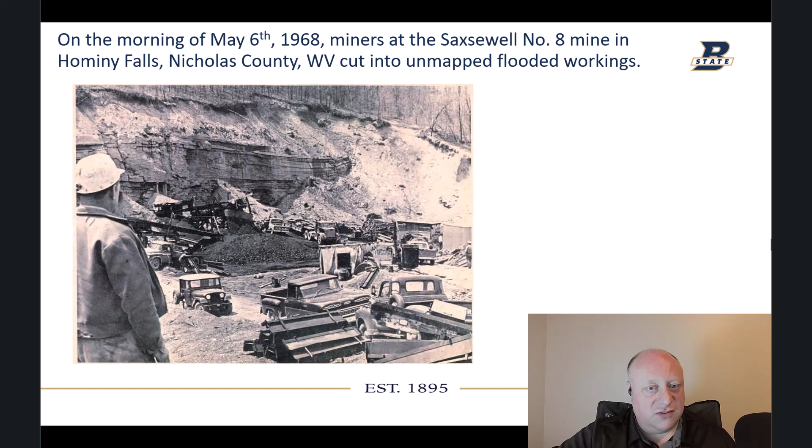So on the morning of May the 6th, 1968, miners at the Saxsewell No. 8 mine in Hominy Falls, Nicholas County, West Virginia, cut into unmapped flooded workings. The amount of water that was coming through the No. 3 heading where they cut in was described to be like opening the gates on Summersville Dam.

Now this dam had only been there about 2 years, and this was before they put in the hydroelectric part of the plant. So they're talking about what you see in this picture — I'm talking about like 3 tubes, just blasting water. That's what they described it as, which is significant. They're saying the water was roof to floor and rib to rib.

And in this mine, they were mining with presumably Wilcox miners — I know they were mining with an auger type miner, that's probably what they were using. And they were mining 32 to 34 inches high, so it's a thin seam. But the headings were advanced 30 feet wide.

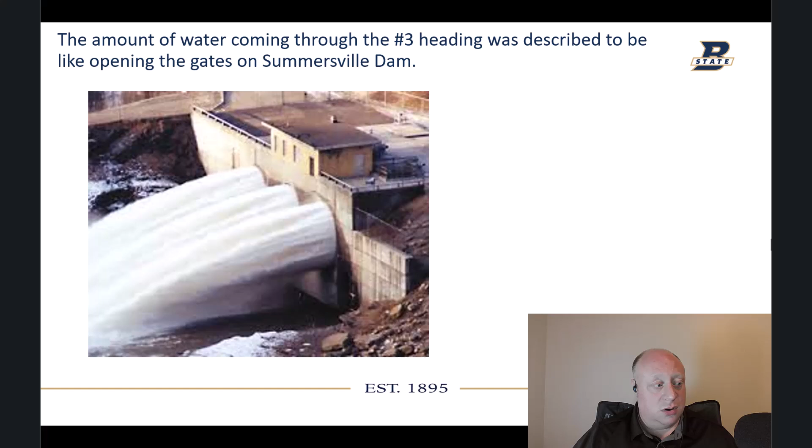So they cut in number 3. There were 5 men in that heading. 4 of them perished, but one somehow grabbed hold of the pan line — that's what they were using for haulage back to the belt, just like you do on a longwall nowadays. He grabbed hold of it and was lacerated in the process, but it threw him over into the number 2 heading, knocked him unconscious, but he was alive. And that's miracle number 1, I think, right there.

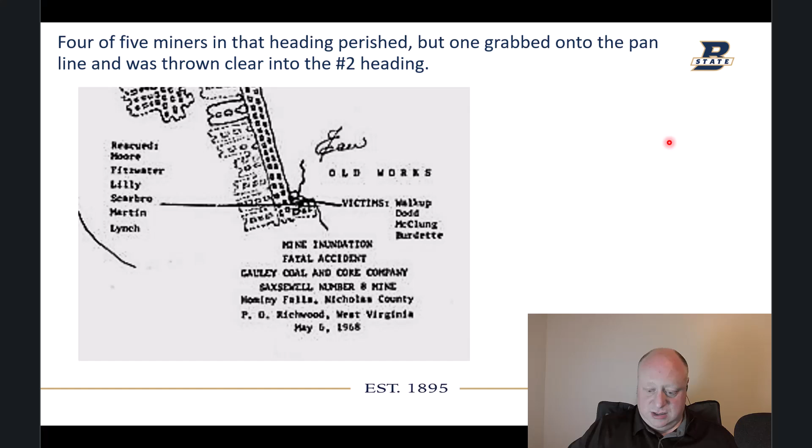So why didn't water get over into the number 1 and number 2 headings? Some credit that not punching through a crosscut for 150 feet in that heading saved the lives of those in number 1 and number 2. What had happened was that miner over in number 2 was broken down, and so they just skipped the crosscut.

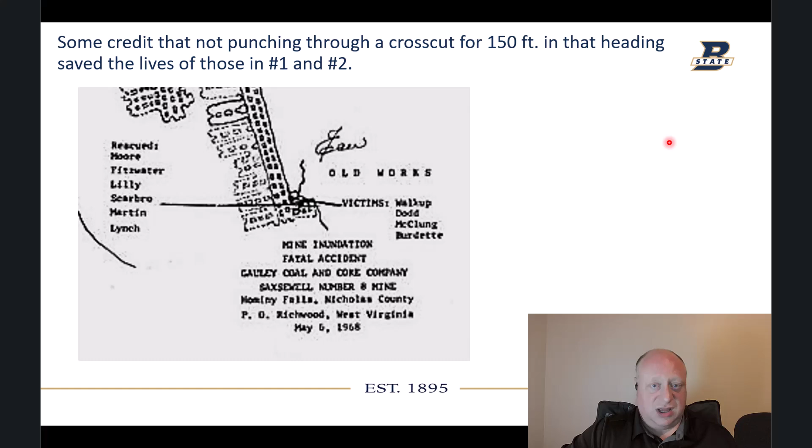So the miner was broken down, and that's why one of the, I don't know if he's an electrician or what, but there was somebody over there working on that miner, and that's who noticed the guy get thrown over into number 2, and obviously the water rushing by. I mean, it was loud, right? And so, anyways.

There is another theory as to why the inflow of water did not go over into the number 1 heading, and some believe the immediate inrush, where it was all encompassing of the opening, created an air pocket or bubble which kept water from flowing over there, so the air was pressurized. That is possible. I don't know for sure if it happened here or not. It's possible.

Because, Quecreek, for example, if you watch the documentary, which I did, those miners talk about how initially the water was waist deep. And when they drilled the first hole in to attempt to rescue those guys, that water level increased and was about neck level. So that indicates that yes, indeed, that air was pressurized by the water somehow, and created that bubble. Fortunately for them, it didn't completely collapse it, but it is possible that could have been going on here.

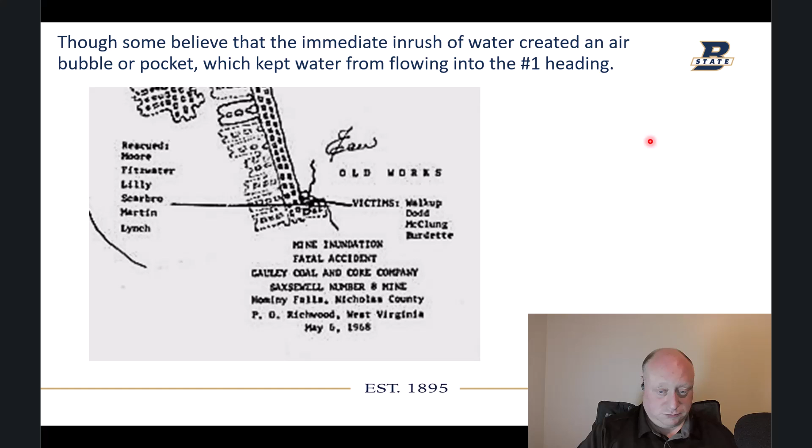There was a second group of miners that were trapped in this area. That's where most of them were. Okay, so they retreated to higher ground, and so did the 2 miners that were down in this area, because you've got water coming out these south mains, right? And it just so it was blocking basically all access, and came up to an elevation that was, I don't know exactly where, but up in here somewhere.

So that's where the majority of the mine workers were.

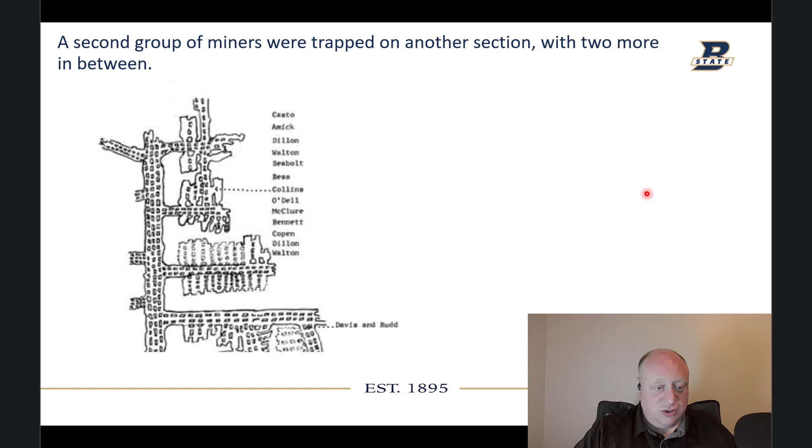And after 6 days of pumping, rescuers located the first 15 survivors, including one man, Andy Walton, who I got to spend a lot of my, I guess I'll call it later youth, when I was in high school and that sort of thing. I went to high school with his grandson, and we were both on the wrestling team and that sort of thing.

So we used to raccoon hunt at night with dogs, and so I spent a lot of nights in the woods with that. I say old man, he was old when I was young, and unfortunately he passed away recently, but he made it up there in years, which is awesome, right? Because he almost didn't survive this day, right?

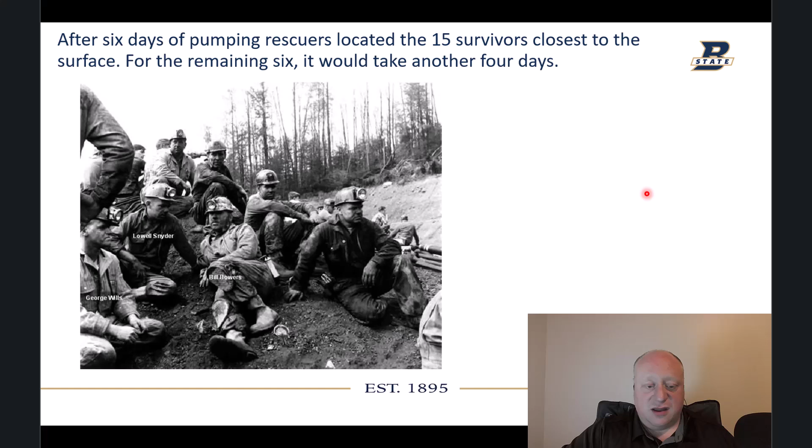For the remaining 6 miners, it would take another 4 days to get to them, and of course, communication had been cut off, and they didn't know what they were going to see, what they were going to find when they got there. To have 6 out of 10 miners still being alive after their section cut into a mine, I mean, that's amazing, and that's where this became known as the miracle of Hominy Falls.

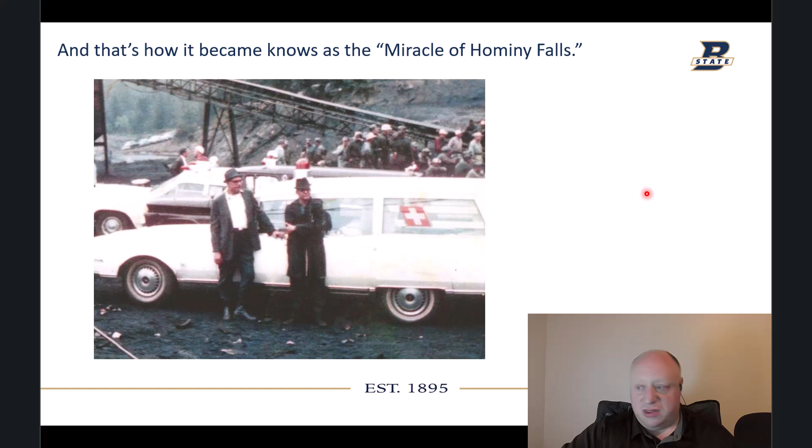And so I'm telling you this story because this is both a story of tragedy and a story of happiness, right? 4 families were devastated, but 21 families got a miracle that day. So with that, that's what we're hoping for now. A miracle for the one.

Okay, so with that story, we're going to move into discussing the 5 underground mining fatalities that have occurred in this country so far this year. There's been 3 in coal and 2 in metal, non-metal.

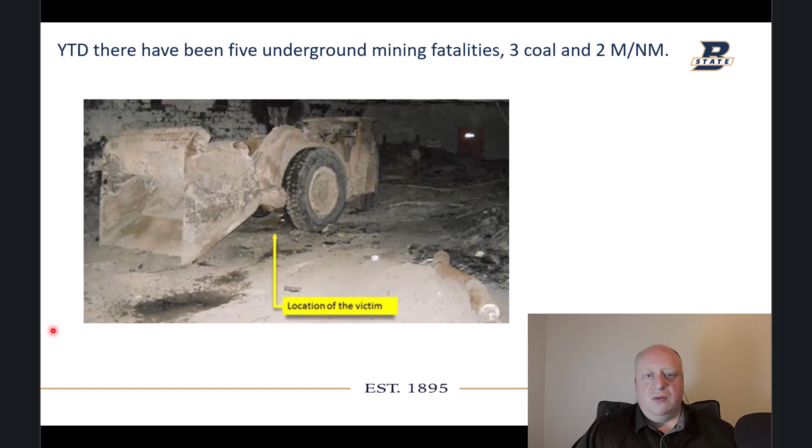And if you go on the MSHA website, you'll be able to find all the list of fatalities that includes the fatality reports. It will tell you the initial report, the fatality alert, which is shown here, and a final report. Some of these don't have the final report out yet, and then of course for the one that occurred Thursday, even the initial report's not out yet. So we're just going to focus on the 4 that we do have reports for.

This first fatality on January 10th was classified as a powered haulage accident. This occurred in central Pennsylvania, over in Somerset, where if you remember when we talked about haulage, I discussed that they use a lot of continuous haulage systems, right? So on that day, a mobile bridge carrier pinned the operator against the coal rib, causing fatal injuries. In these fatality alerts, you're going to see a list of best practices.

What I want to point out about these is, this is absolutely not to say these aren't good best practices. They are, but I want you to know these are canned responses. When this is what the fatality involves, they'll put these canned responses as best practices, which is fine, but it doesn't necessarily give you a lot of information about what actually went on here.

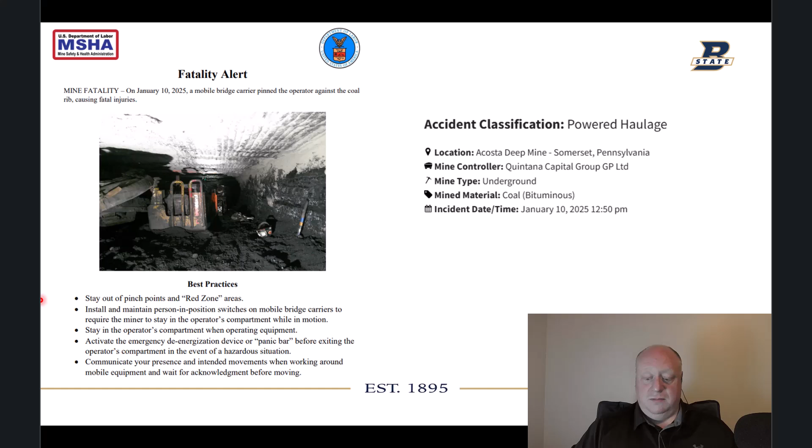The second fatality, July 12th, was a fall of roof or back. In hard rock mining terminology, they used back as the top, or in stone. Sometimes in hard rock, if it's steeply dipping, or even moderately dipping, they'll call it a hanging wall and footwall. But in this case, we're talking about the roof or the top.

The miner was operating this load haul dump, LHD, mucking out this blasted area when material from this active stope fell onto him and killed him. So again, best practices: only traveling areas with a ground support system designed, installed, and maintained to control the ground well. I can't see the ground support in this case.

I don't know what they're using, but I do know there are limestone mines that don't routinely roof bolt, so this wouldn't apply to them. Understand and follow the ground control procedures and mining methods. Maybe they weren't, I don't know.

Perform work from a safe location, of course. Only travel within designated safe zones or signage, hazardous areas, and conduct thorough work examinations. That's probably the best one here. Be sure to conduct your thorough workplace examinations before starting shift, after you blast, as conditions warrant. Just examine the workplace as needed. That's probably a big one.

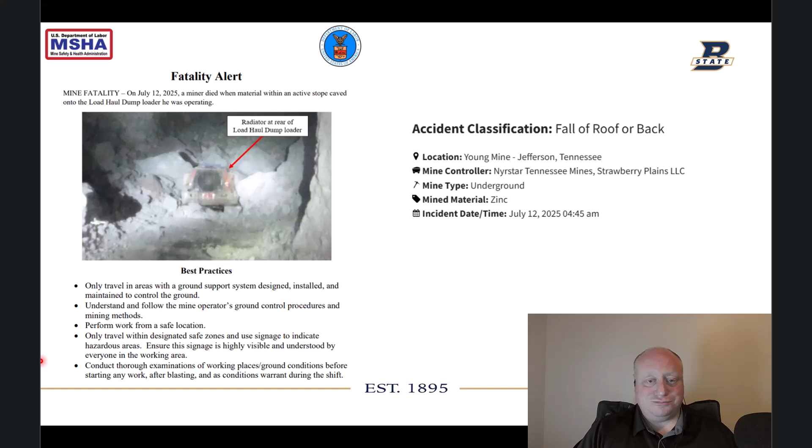The third fatality occurred in a platinum mine. I think there's only one - that's this Stillwater mine out in Montana. And this was an electrical accident. On that day, July 26th, an electrician was electrocuted when he came in contact with one phase of a 13,200 volt three-phase power source.

In the best practices, it says always lock out, tag out, and try out electrical equipment prior to work. I've noticed more and more of safety education adding on the try out to what used to be called lock and tag out procedures. So they're adding that in there, and that's fine. I think that's something we had mostly done in the past anyways, right?

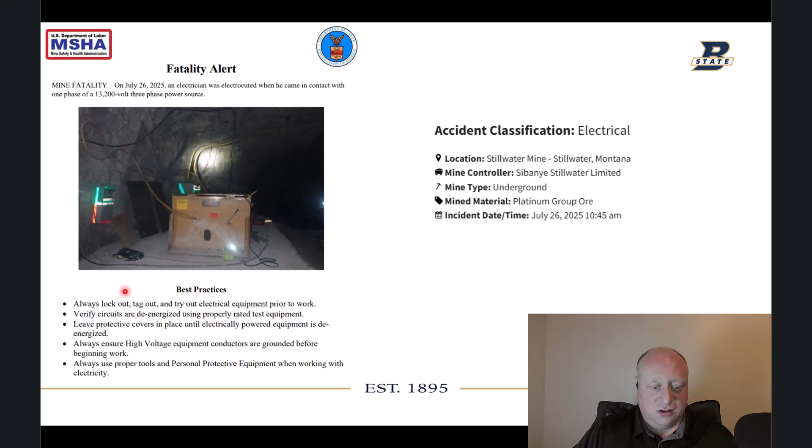Lock it out, and then you try to turn it on to make sure it is de-energized, and of course you need to be verifying the circuits are de-energized with circuit testing equipment and that sort of thing. But just throwing that out there, this tryout is sort of a new thing, but it's something we've tried to do as much as we could over time, because you never know - what if you just lock and tag out the wrong cat head, right? So that's why there's multiple stages to what to do when you're working on electrical equipment.

And then the fourth accident was a limestone mine, Heidelberg Materials up at Torrance. The blaster was loading holes from the ground. A piece of roof fell and struck him. In these mines, the roof's pretty high, right? So even small pieces, in limestone especially, can be very hazardous, right?

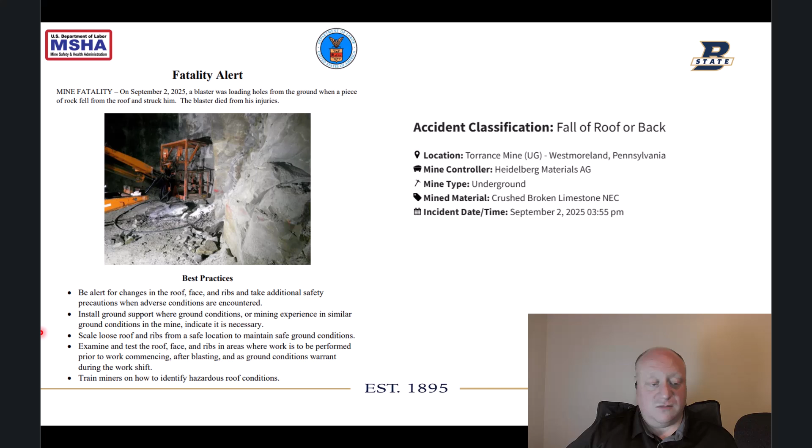So best practices being: be alert for changes in the roof, face, and ribs. Yeah, we should always be looking for that when we're on the ground. Installing ground support where the conditions indicate it's necessary. Yeah, sounds about right. Scale roof and ribs. Yeah. Examine and test the roof, face, and ribs in areas where work is going to be performed prior to doing the work. And then training miners on how to identify hazardous roof conditions.

I think that's probably the big one here, right? Training is important, and we do need to get better at training miners on how to identify hazardous conditions, be it roof, rib, other things, right? Just any hazardous conditions. We need to get better at identifying those things, and we're working on it. We really are, with better instructional technique, and in the future, I see that eventually we'll be using - we're already starting to use - augmented and virtual reality to better train, right? And we're working in that direction already.

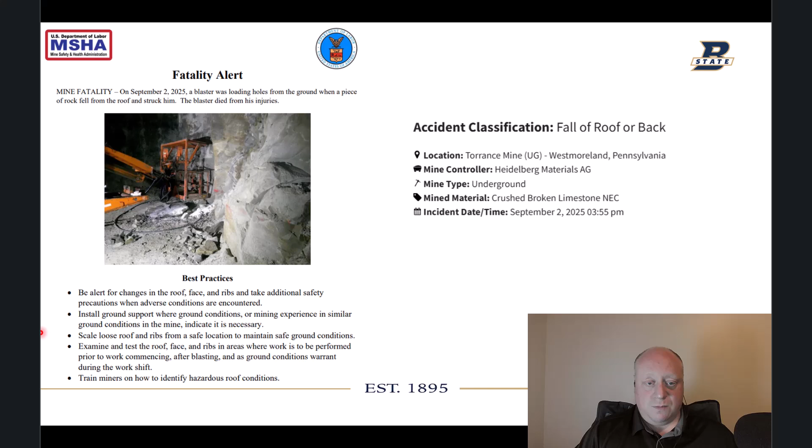And then, of course, like I said, you have the fifth fatality, which was the mine worker in Tucker County, which, like I said, the preliminary report isn't out yet, so the investigation is still ongoing. But because of what happened last week, I think it's good that we talk about this now.